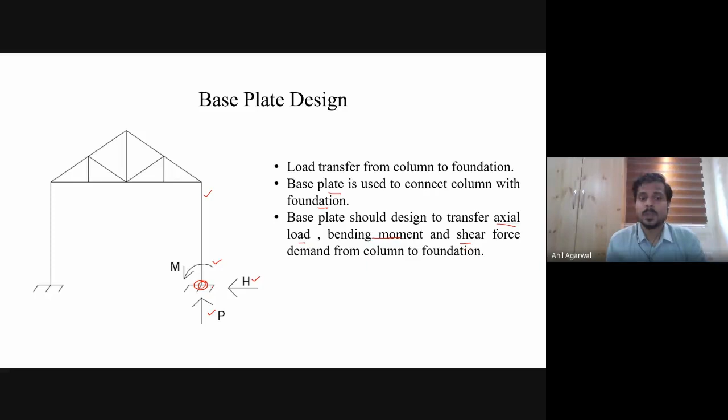So this is a typical detail of a base plate. What is what here? So this is your column. Let's say it's a structural steel column, right? So this can be an IS column section. You're familiar with some of the IS column sections or ISMB section. So this could be one of the column sections with parallel flanges. Okay. So this is that section, and then at the base, it is capped with a base plate.

So basically, in 3D, here, what you see is this is the column, and this is the base plate. The column is connected to the base plate through welding. So either you may go for a fillet weld. What you see here are fillet welds. You all know what fillet welds are, right? Whenever you have two perpendicular surfaces, this could be the column and this is the base plate, here you get a perpendicular surface. If you put this triangular shaped weld, this is called a fillet weld.

Okay. The other alternative could be to go for a groove weld. In that case, you had a column which was coming out like this. If the column plates are very thick, you may cut a groove in these column plates, and then you have the base plate, and then you can fill this space with a weld material. This is called a groove weld, or butt weld. When you go for a groove weld kind of a system, it is always preferential to go for a full penetration groove weld.

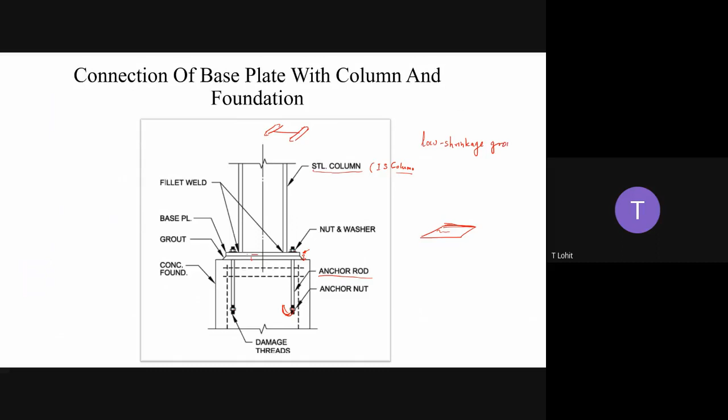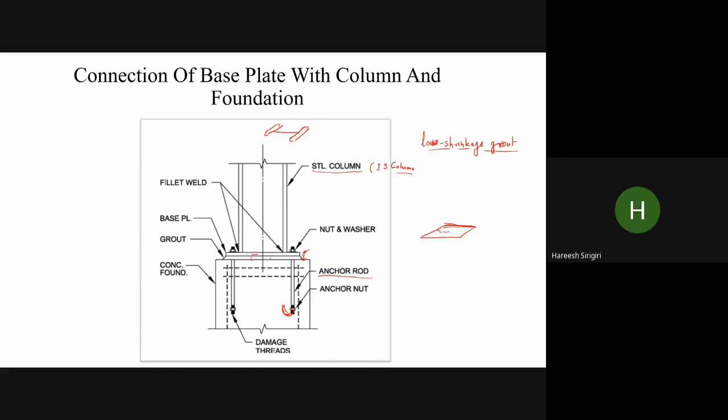Why low shrinkage grout? To avoid the shrinkage, right? Yeah. What's the problem if there is shrinkage? The base plate will not be... Uneven settlements. It can settle differentially; if it is uniform, then no problem. So basically the differential settlement. See, let's say if it is 1 inch and there is shrinkage, it is not going to cause a differential settlement to the building.

How much will the shrinkage strain typically be? So that is not going to be a differential settlement problem. It is going to be a loss of contact. As soon as this grout starts to shrink, and if it shrinks by a large enough amount, you will have a cracked surface here. You can call it a crack or a delamination, and you will have a loss of contact.

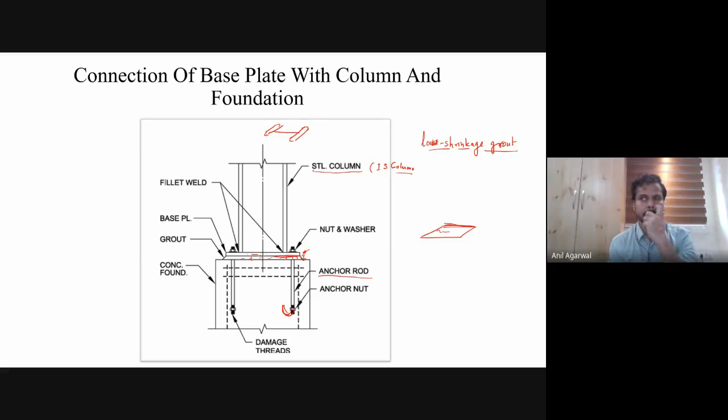And then you will have this grout cracked all over, so it will not be stable there. Once this grout has cracked due to shrinkage, because it is not confined very well from all sides, it is just sitting there. Once it loses contact with the top surface and cracks inside, it will not provide resistance against corrosion. It will allow water to seep in. All kinds of issues will arise.

And also, if there is any vibration kind of loading, chances are that this will slowly start to move around, and it will not be effective. This grout should be of high enough strength so that it resists all the forces that we are designing this foundation, this base plate for. So that's why we typically need low shrinkage grout.

But you will often see that as long as this thickness is not very high, even regular mortar also works, and people use this regular kind of mortar. Then of course, on this anchor rod you have to have threads where you can put these nuts from the top to tighten the whole thing together. These anchor rods are seldom high strength. Usually they are normal strength steel, usually 410 MPa, regular steel threaded rods.

As far as compressive loadings are concerned, these anchors don't have much of a role to play as long as they just hold the column in place, because we are assuming there is no significant lateral load or uplift force, that is, moment demand. As long as that is true, we don't really have to design the anchors. We can go with the minimum requirement, whatever is available, common practice, or makes sense.

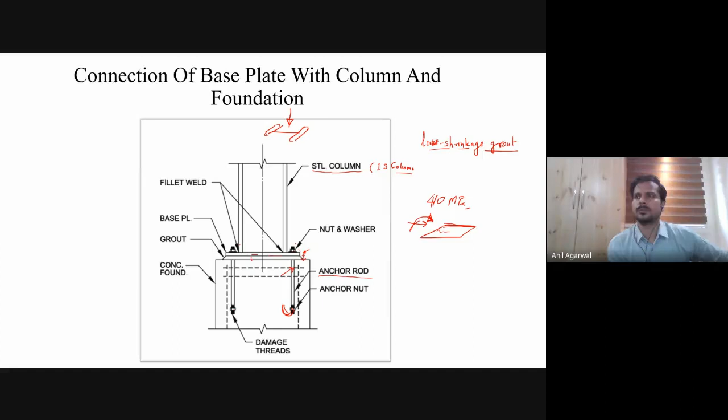So this we have covered. So typically, how does the design go? The purpose of the design of a base plate for pure compressive conditions is to make sure that two things don't happen. One, the concrete under the base plate does not crush, or if we are putting grout, that grout has a certain strength and does not crush. Usually we make sure the grout is of higher strength than the concrete.

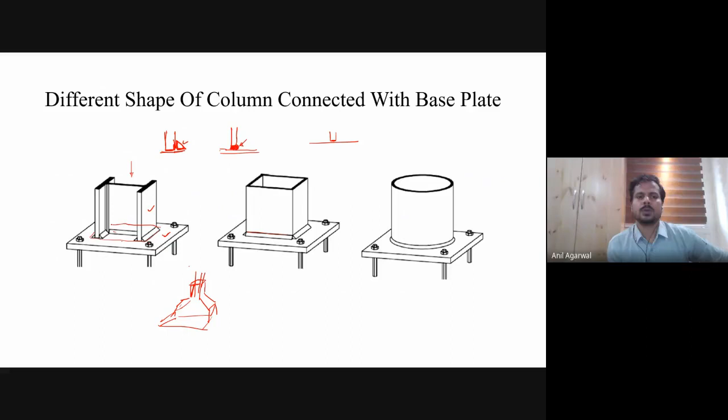Second, the base plate itself does not fail. And in what way can it fail? We will talk about that. If it is pure compression, there should not be any strong reason for the base plate to fail. If the base plate was only of this size and we were able to make sure the concrete does not crush, the base plate should not fail. If concrete with a crushing strength of, say, 20 MPa is not crushing, the base plate definitely would not fail. The base plate is much stronger than that.

But usually that is not the approach, because in order to make sure the concrete does not crush, we have to extend the base plate. So the base plate is almost always bigger than the column. The column cross section is only this much, and the base plate extends beyond it. Also, you need a place to put the anchors, so for that reason also you have to extend it.

Once you extend it beyond the column cross section, the forces acting on the base plate are not perfectly face to face. They are applied at an offset, and that causes some issues. So first we will talk about the bearing strength of the concrete. The concrete will be under stress, and there are two different codes you can refer to. IS 456 says the bearing strength of concrete should be taken as 45% of the FCK value.

The IS 800 says it should be taken as 60% of FCK. So we can typically be conservative, because we don't know whether we are dealing with steel design here or concrete design here. Okay, so we can be conservative. We can take 0.45 FCK, whichever code is giving us the smaller value. Okay, we can use that smaller value.

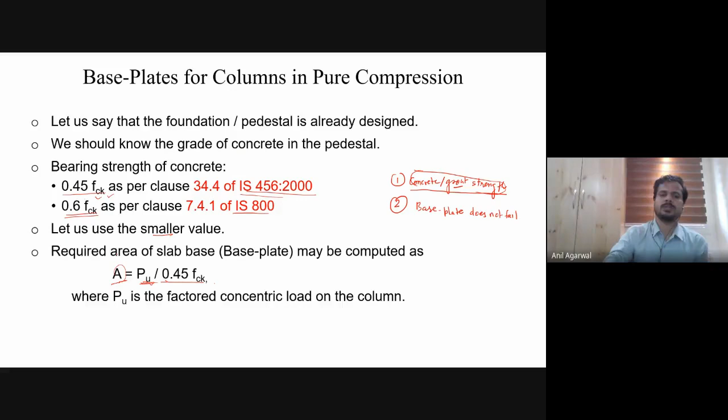So if you had this base plate, this is the size of the base plate. So you take the total load PU, factored total load already has all the factors added, total pure compressive load, that divided by A. So PU divided by A should be less than 0.45 FCK. Okay, makes sense, right?

Going forward, now comes the question of how to make sure that your base plate itself is safe. It can be called a base plate, or sometimes it is also known as slab base or base slab. Okay. So this is basically a steel plate, and let's say you have a cross section, this column cross section, which is sitting on this base plate in this way, and your column size is BF by D. D is the depth and BF is the width.

Okay, and let's say your base plate is extending by A and B amount on the respective sides. So the base plate dimension will be taken as L by B, wherein L will be equal to D plus 2B, 1B here, 1B here. Okay. And similarly, your B will be equal to BF plus 2A. Okay. So this will be the typical area that we can take for the base plate.

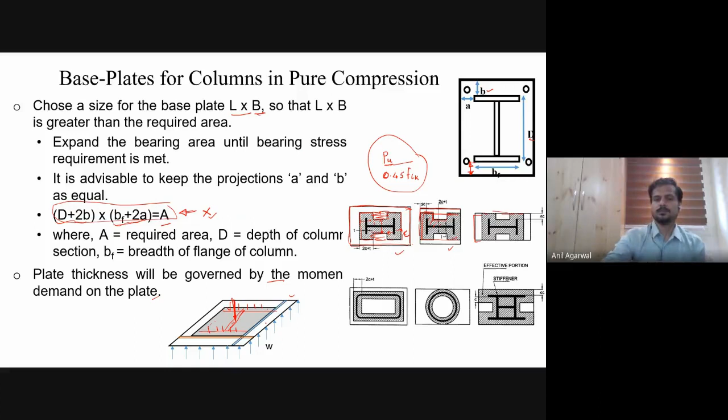So whatever area of the base plate that is extending outside this gray region is basically under eccentric loading and will be subjected to some kind of a moment demand. And that moment demand should not be large enough so that it makes the plate fail. So for that, you have to design this plate. So for example, if I have this base plate and this gray area represents the forces belonging to the column, that is downward force on the base plate, and the upward reaction is coming from everywhere throughout the cross-section area of the base plate.

Now, if you look at this, this is the gray area, this entire area is this much. And your base plate is extending by 2b, b on both sides of the loaded area. And then let's say the reaction is W. Reaction is calculated as W, and this W will be equal to total P, that is total Pu coming onto it, divided by A divided by B. Okay, total area of the base plate.

Of course, this W will cause some moment here, but you can understand this is almost like a cantilever, right? So this moment demand at this fixed end of the cantilever should not be too large so that the plate fails. The plate should not plasticize. Okay, so how much will be the moment demand? If we know the distributed load is W, then W multiplied by B square divided by 2 will be the bending moment in a strip.

Let's say this is that strip we are looking at. This is the length of that strip. We have aligned that particular strip this way. So this was the length B. Correct? So over that length, the distributed load from the pedestal, that load W, is acting everywhere. So WB square by 2 will be the bending moment demand at this point. Now, basically, we have to make sure that this moment demand is within the capacity.

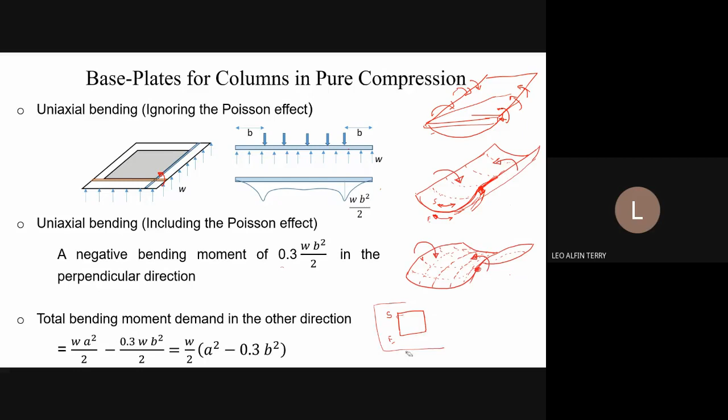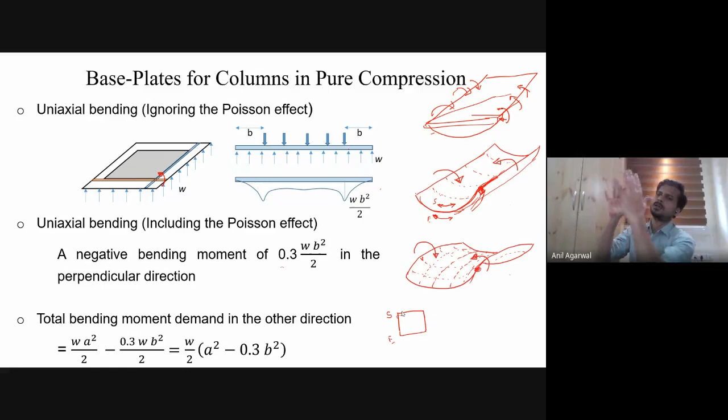So now if it is shrinking in the out of the plane direction, I'm compressing it in this direction. What will happen in this direction and that direction? That is the way to show compression or inward movement. So what will happen in this direction? Because of Poisson's effect, it will expand in this direction. Correct?

This is the way to show. Okay. So in this direction, it will expand. Similarly, since it is expanding in this direction, in the lateral directions, it will shrink because of Poisson's effect. Okay. So now the shape of this thing will actually change.

Okay, so which basically means that, let me again mark it. Let's call it X, let's call it Y. So now X direction is in out of the plane direction, and Y direction is this one. Okay. So in the X direction, I was introducing the bending moment in such a way so that there was expansion and contraction in the X direction. But because of the Poisson's effect, now I've got expansion and contraction in the Y direction. That means there is a bending introduced in the Y direction also.

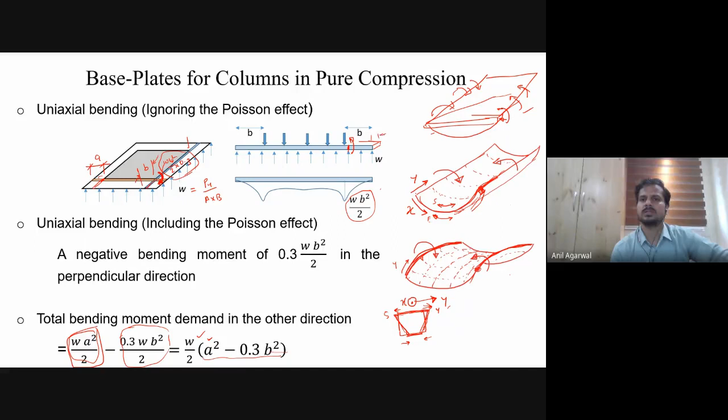Now the moment capacity for a plate. If you have a plate, and again, we are taking a unit width. Likewise, we took a unit thickness here also. I never mentioned in this entire calculation, this W is the per unit area force. So what is the width of this strip? I never mentioned the width of this strip. This was unit width, 1 millimeter you might assume. So these strips are 1 millimeter wide. Now, what is the capacity of that 1 millimeter wide strip?

Moment design capacity. We know it is S multiplied by Fy, right? S is the section modulus multiplied by Fy divided by gamma m0. Now this S is basically your elastic section modulus. If you want to design for plastic limit state, where we are allowing the entire cross section to plasticize, approximately you can take it as 1.2. So 1.2 times the section modulus should give you the approximate plastic section modulus, multiplied by Fy divided by gamma m0. Now we can do the rest of the calculation. S is nothing but I divided by T by 2. T is the thickness of the plate.

What are we trying to do here? This was the strip of the plate. This was W acting here. This was, let's say, fixed here. And we want to know what is the moment capacity of this section that I'm coloring right now. So how will we calculate that moment capacity? We are talking about moment capacity in this axis. So T is the thickness. Width I have assumed to be unit.

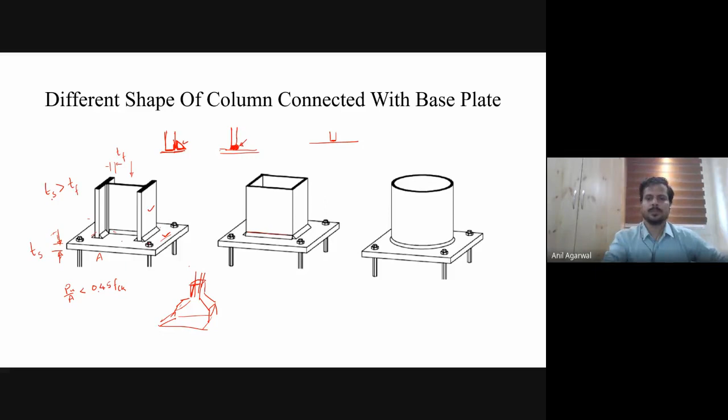So first we do this calculation. First we solve for T here. For solving for T, what do we need? We need W, we need to know Fy of the plate, and we need to know the dimensions of the plate that is extending outside the column cross section. Once we know those, we can calculate the required thickness, and then the base plate has to be thick enough so that it is more than this and more than TF. The idea for the plate to be more than TF is so that it does not cause a punching into the plate. Okay.

Then, in addition to the base plate, we need to provide anchor bolts, and anchor bolts should be 2 to 4 in numbers. As long as forces are purely in compression, the anchor bolts requirement is not very specific. Whatever is the conventional, whatever seems okay, you can provide. Usually, at least 4 are provided. 2 is still too low. So always we go with 4 anchor bolts. But it is a hypothetical condition.

For most of the columns, you will have some kind of a shear force demand or bending moment demand, and the anchor bolts have to be designed for that bending moment demand. In addition to that, a proper grouting is very essential under the base plate. Between the pedestal and the base plate, you have to do grouting before you put this thing in service. And also full penetration or sufficient strength fillet welds have to be done between the column and the base plate that I have discussed already.

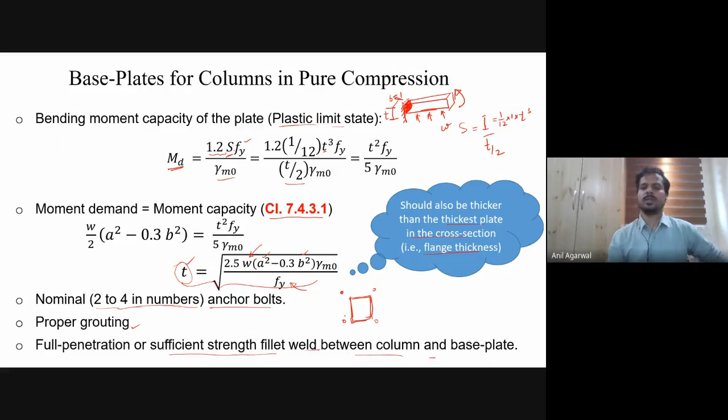If the loading is eccentric, then it goes into the domain which is almost like concrete design. Basically, what happens is that as long as you are doing this weld, this could be a groove weld like here, like I'm showing, or it could be a fillet weld like I'm showing here. So whatever type of weld you are going with, that weld has to be stronger than the plate itself, the member itself, so it can resist the entire capacity of the member.

That is one part. In addition to that, you have to provide the anchors. Now, anchor design is mostly considered within the RC design. So I don't know whether this will be covered in your advanced RC class, but all the codes do mention how to design an anchor for concrete, because when an anchor fails, typically it is the concrete that fails. So we have to design the anchor depth and diameter based on the concrete failure. So anchors have to be designed.

And also, when you design the base plate, your reaction from concrete here, for example, if you are under a bending moment kind of condition, you have normal force acting and you have a moment. When you have a moment acting, your anchors also have to be designed for the tensile force demand. So usually that's how the anchors are designed, because you will usually have some kind of a bending moment demand. That force you have to worry about.

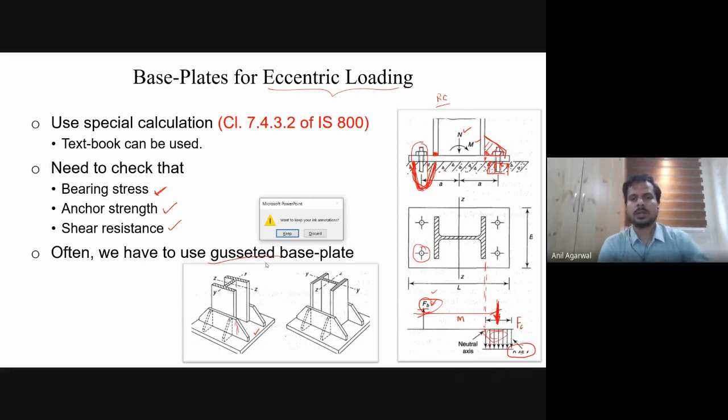Sir, you said in steel we generally go for the concrete foundation, but somewhere I heard that grillage foundations are also used. Do they really use them now? Can you repeat? Grillage foundations. In the bottom one they'll lay the steel beams in both transverse directions. Okay. At least in India, I have not seen it used very much. I don't know how often it is used. Yeah. Anything else?

Excuse me, sir. Between equating the moment demand and moment capacity, we take the rectangular section, so the shape factor is 1.5, but we take 1.2. Actually, that's a conservative one. The shape factor for a rectangular shape is 1.5. Ideally they should have taken 1. Why do they allow the base plate to yield at all? But they are taking it as 1.2. That is what the Indian code does. It's trying to be conservative, I suppose. They don't give explanations why exactly they go for 1.2 instead of 1.5. Okay, sir. Yeah. Anything else?